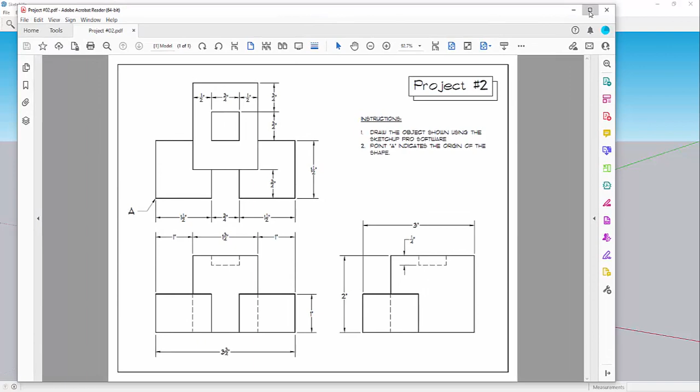We're going to start with the simple template, or you can start with the project 1 template if you'd prefer, so we'll hit simple inches. The project we're working on looks like this. I'll link a PDF copy of this from Google Drive into the description so you can follow along if you decide to do this.

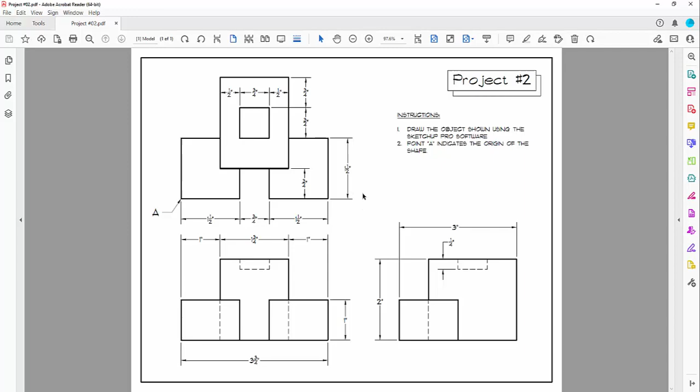It's basically just 3 cubes linked together with a little depression up at the top. We're going to go over the copy command, and then we'll also cover how to merge solids together. Okay, let's go ahead and delete her.

We're going to start with the lower left corner solid. This is 1.5 by 1.5 by 1 inch tall. So we'll do a rectangle. I'm going to place the bottom left corner at the origin, and then we'll type in the dimensions. So, 1.5.

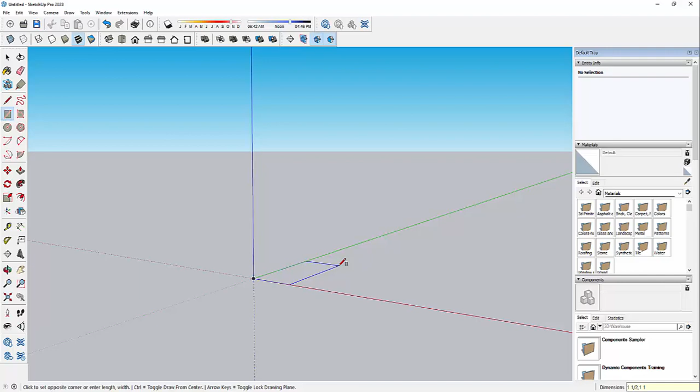I'm just typing this down at the bottom right. And then another 1.5. There we go. You'll have to zoom in because this template's designed for much larger projects. So I'm panning the view with the wheel on my mouse, moving up and down.

Let's go ahead and give this a thickness or height, so we're going to go 1 inch. Then we need to figure out the distance between the cubes, so we're going to do our guideline here. I'm just going to do a guide at 3/4 inch distance. That's this distance right here.

Okay, let's grab the cube and copy it. So this is how you copy: I'm going to click on my start point and get it moving, and then as soon as it starts moving, I'll hit the control key and it'll make a duplicate of it. There is no copy tool over here; instead, you use the move tool with the control key. And there is our copy.

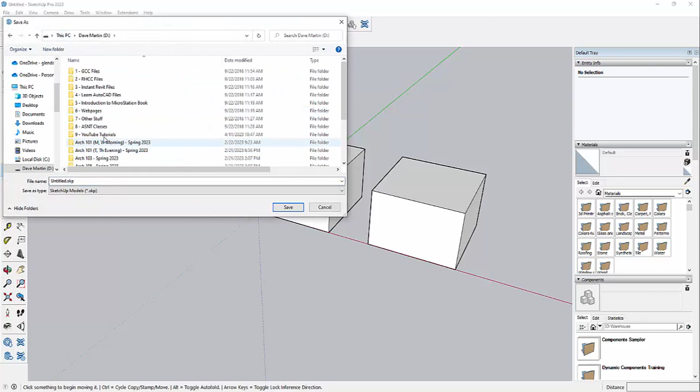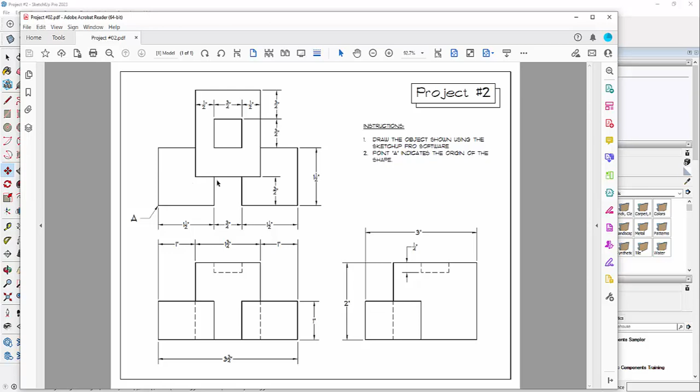Okay, so now let's do the next shape. This one is going to be 2.25 deep along this axis. Then it's a total height of 2, and the width is going to be 1/2 plus 3/4 plus 1/2, which is 1 3/4. I'm just going to draw this out in open space because I want to show you how to union or combine solids together.

So we're going to go a width of 1 3/4, comma, and then a depth of 2.25. There we go. And then we'll give it a height of 2.

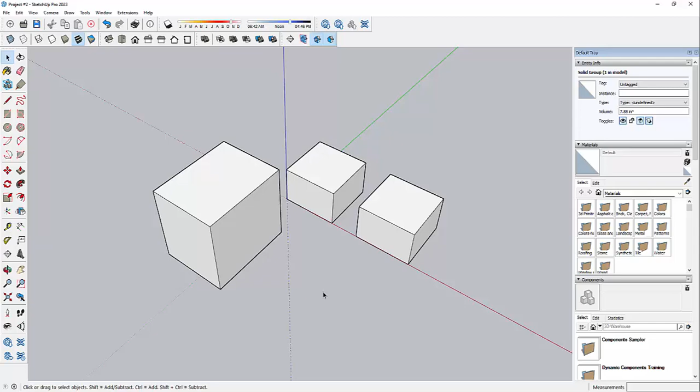Now we need to convert all these into their own solid. The way you do that, it's actually a fairly straightforward process: you pick the solid or the elements that you want to create as a solid, and then you right-click and hit Make Group. You can also do a component, which we'll get into later, but we're going to do a group. So now this is all one single element.

Then we'll do the same thing with these other 2 solids, or other 2 cubes. So right-click Group—there is no command over here, by the way, you have to right-click. And then right-click again, Group. So now we have 3 solids here. This way, you can also click on the solid, and then over here it tells you the volume.

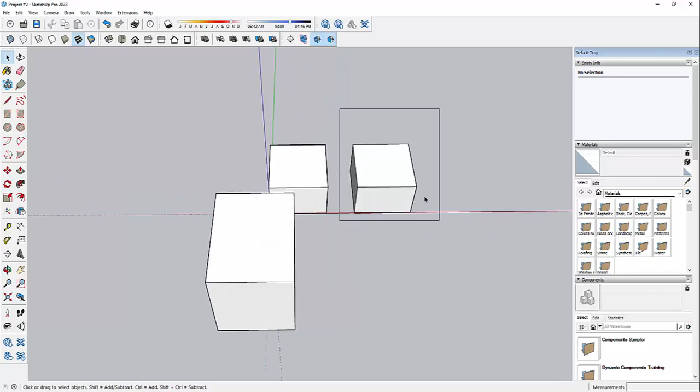Without that, you wouldn't know the volume. And then if you want to ungroup something, you just do the reverse: click on it, right-click, explode. See, so now I'm back to individual surfaces here. Okay, so let's go ahead and make it into a group.

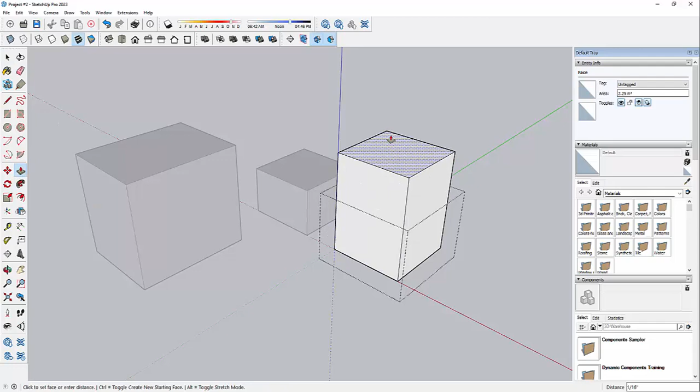And then you can also modify this without exploding it just by double-clicking on it. See, so everything else grays out, and now you can make modifications. Okay, I'm not going to do that because these are the right sizes. So to get out of editing mode, just click away from the group.

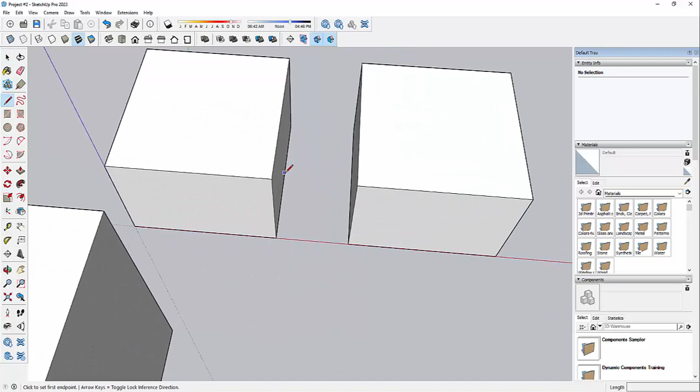All right, so we need to figure out where we're going to place the center line of the front edge. So let's do this—this will probably be the easiest way. I'm going to draw a line from midpoint in the group to midpoint. Okay, just a temporary line there.

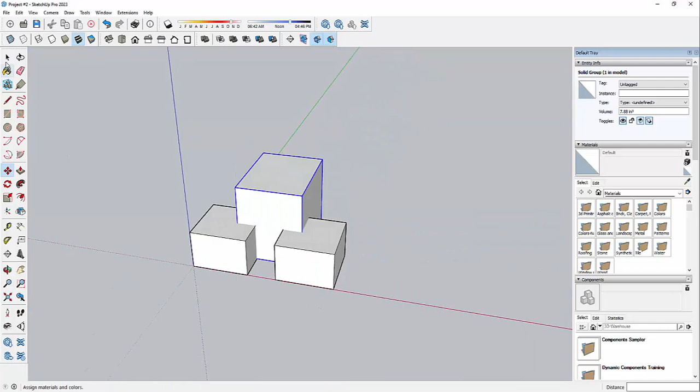Then I'm going to grab this group—I had to pause for a sec—and grab it by its midpoint and then drag it over here. So now we have intersecting groups. And now I can delete that line that I don't need. Let me do this. There we go. That got it. Okay, now you're going to see that this is overlapping, I should say.

So this is overlapping. We want it to be one continuous solid. So we have some tools up here called solid tools. You have outer shell, which is the one we're going to use. You have intersect, which creates a solid where intersection happens. Then you have union, subtract, trim, and split. Okay, so we're going to use the outer shell.

So I'm going to select the first solid—see, it has a little number 1 next to it—and then the second solid, and then the other solid. Okay, so now you can see here that this is all one big group. Before it was overlapping solids; now they're all intersecting one another.

Okay, so let's click away. Now this is all one group. If we wanted to, we could explode, and then we could get back into modifying individual surfaces. See? Or you could have left it a group.

Let me undo what I just did here. There we go. Undo again. Oops, redo—I guess I can't undo that, sorry. So let's make it into a solid again. Oh, error message, my fault. So let's go to solid, click here, click here, click here. Okay, so you can union as many solids as you want together.

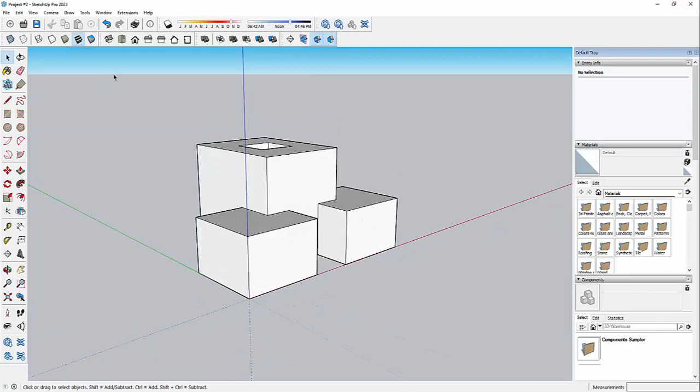And it's a good idea to check to make sure that you don't have any interior lines, which we don't. So I went into this mode here—X-ray mode, sorry, I forgot the name of it. Great, okay, don't forget to save. And there you have it. Thanks.